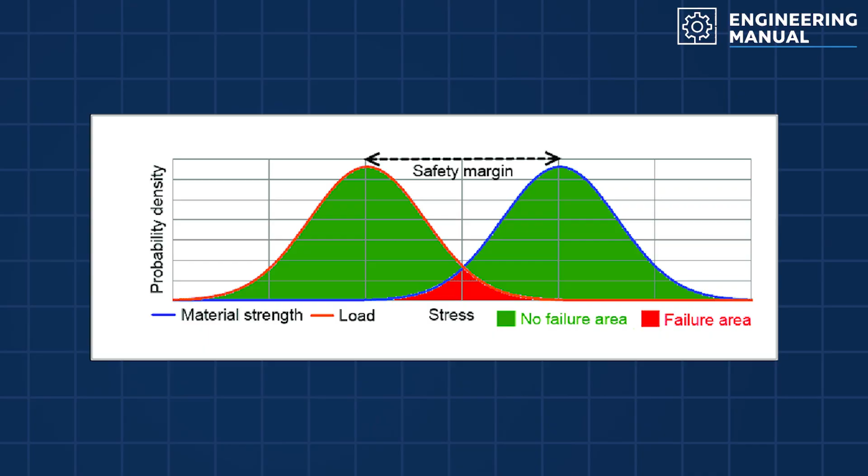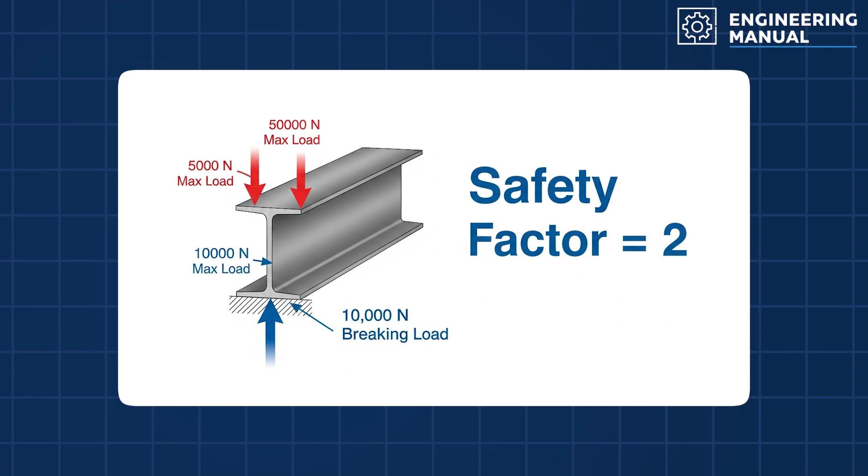At its simplest, a margin of safety is the buffer between the maximum stress a system is expected to experience and the stress that would cause it to fail. Engineers often express this as a safety factor. If a beam can withstand 10,000 newtons before breaking, and the maximum expected load is 5,000 newtons, the safety factor is 2. In other words, the structure can theoretically handle twice the intended load before failure.

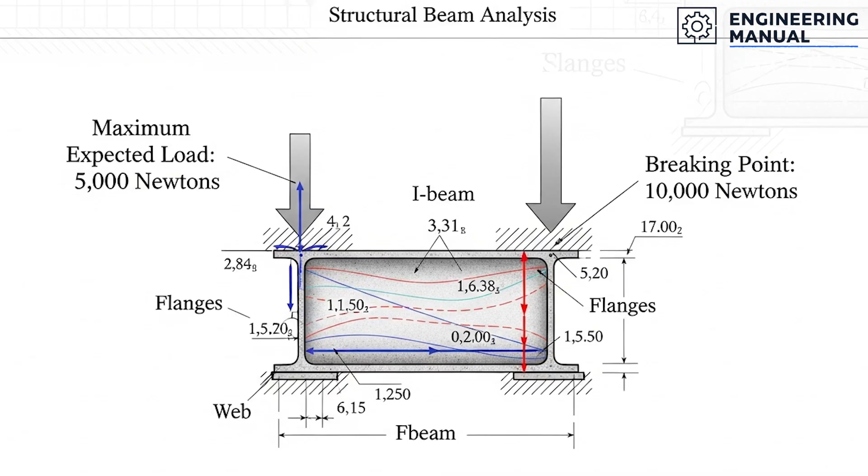But that simple ratio hides a deeper truth. The expected load is not a single fixed number. It is an estimate based on assumptions.

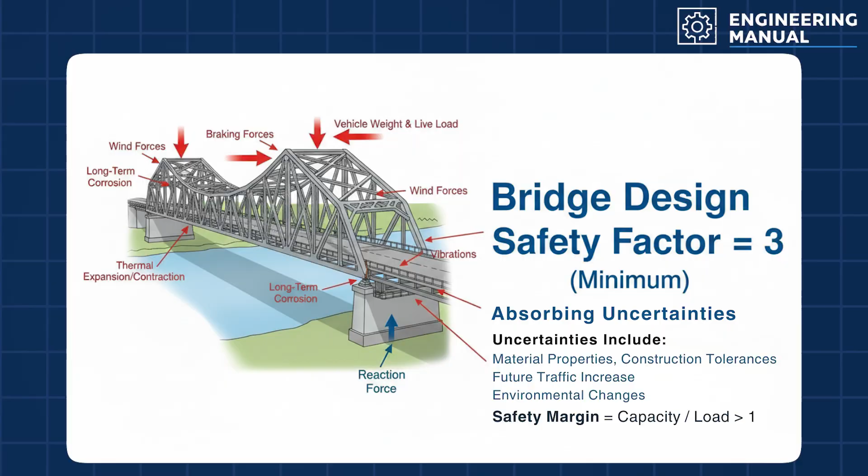Consider a bridge. The load includes not only the weight of vehicles, but also wind forces, thermal expansion, braking forces, vibrations, and long-term corrosion. Traffic patterns may increase over decades. Trucks may become heavier. Climate conditions may shift. What was once a reasonable maximum load can quietly evolve.

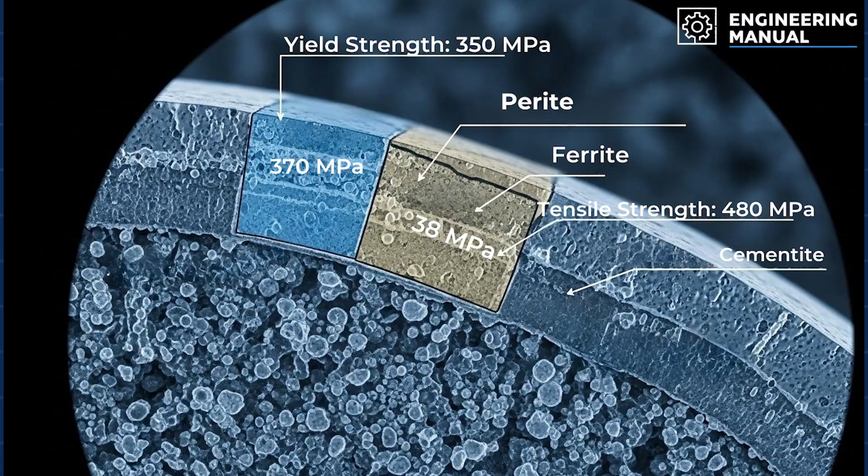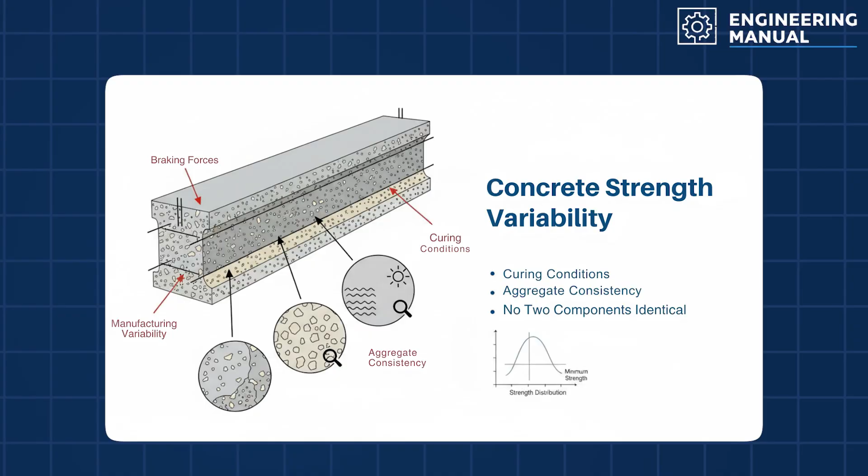Even material strength is not a single number. Steel produced in different batches can vary slightly in composition and microstructure. Concrete strength depends on curing conditions and aggregate consistency. Manufacturing processes introduce variability at every stage. No two components are perfectly identical.

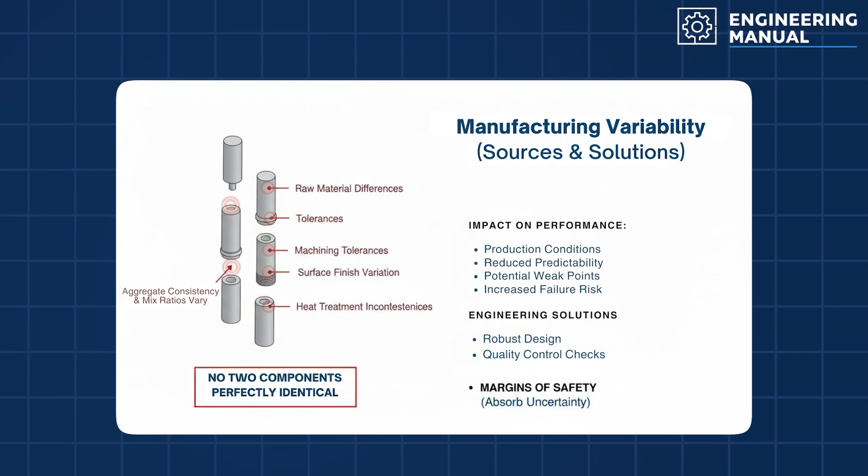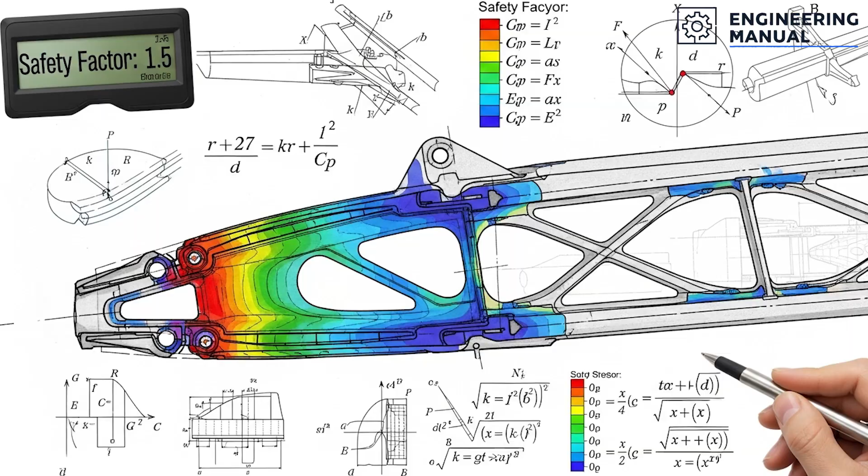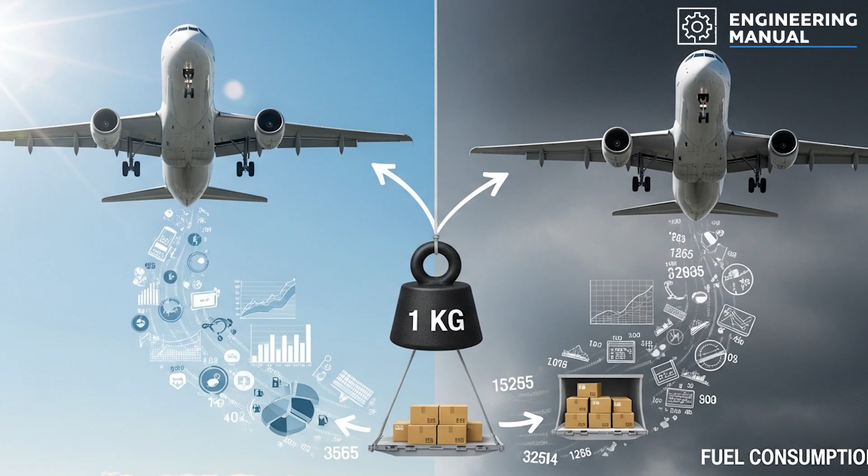In aerospace engineering, however, safety factors are usually lower, often around 1.5 for structural components. That might sound risky, but aircraft operate under a different optimization constraint. Every kilogram of extra structure increases fuel consumption and reduces payload capacity. Overbuilding an airplane is not just inefficient. It can make the entire system economically unviable.

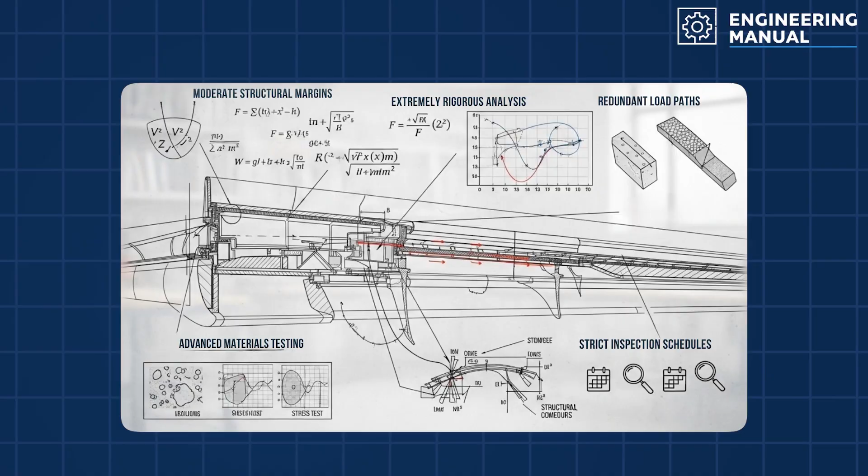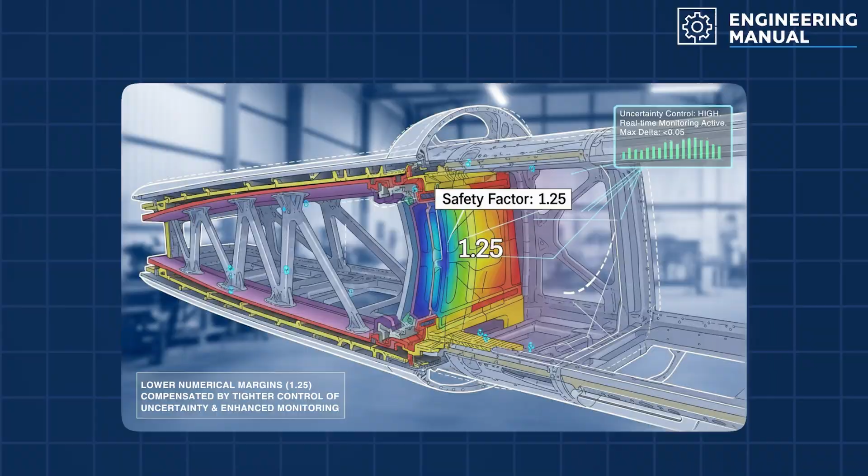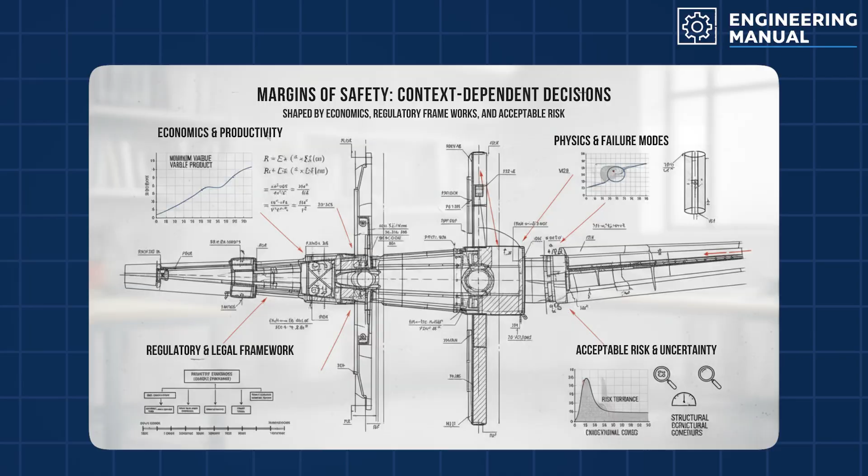Instead of relying solely on large safety factors, aerospace engineers combine moderate structural margins with extremely rigorous analysis, advanced materials testing, redundant load paths, and strict inspection schedules. In other words, lower numerical margins are compensated by tighter control of uncertainty. This highlights a critical principle. Margins of safety are not universal numbers. They are context-dependent decisions shaped by economics, physics, regulatory frameworks, and acceptable risk.

To understand this more deeply, consider how loads are categorized. Engineers distinguish between static loads and dynamic loads. A static load might be the weight of equipment resting on a platform. A dynamic load involves motion, acceleration, or impact.

Dynamic loads can amplify stress beyond what simple static calculations predict. A sudden gust of wind can produce forces significantly higher than steady airflow. A moving vehicle crossing a bridge can induce vibrations that momentarily increase stress. Because dynamic effects are harder to predict precisely, safety margins must account for them.

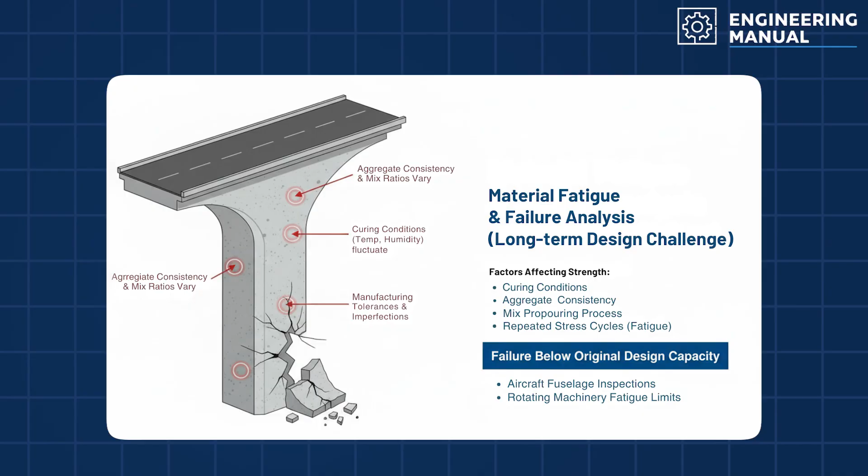Another layer of complexity comes from fatigue. Even if a structure never exceeds its yield strength, repeated cyclic loading can initiate microscopic cracks. Over time, those cracks propagate. Eventually, failure can occur at stress levels far below the material's original capacity. This phenomenon is why aircraft fuselages are inspected regularly and why rotating machinery components are assigned fatigue life limits.

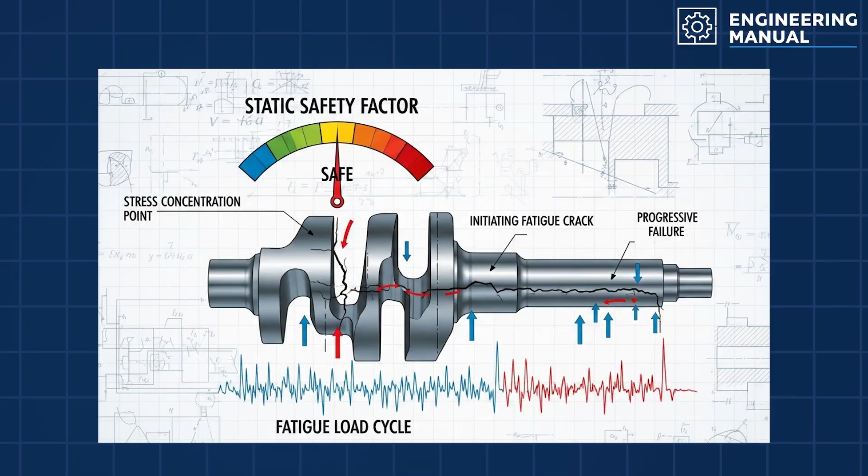A static safety factor alone cannot prevent fatigue failure. Engineers must analyze stress cycles, estimate crack growth rates, and incorporate inspection intervals. Margins of safety in this context are tied not just to strength, but to time.

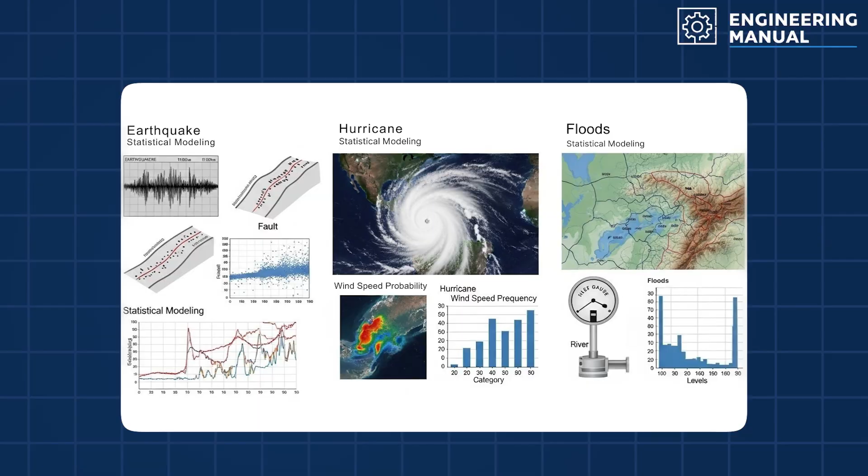Now consider extreme events. Earthquakes, hurricanes, and floods are typically modeled using statistical data. Engineers might design a building to withstand a 1 in 50 year storm or a 1 in 100 year earthquake, but rare events can exceed historical precedent. When that happens, even well-designed systems can fail.

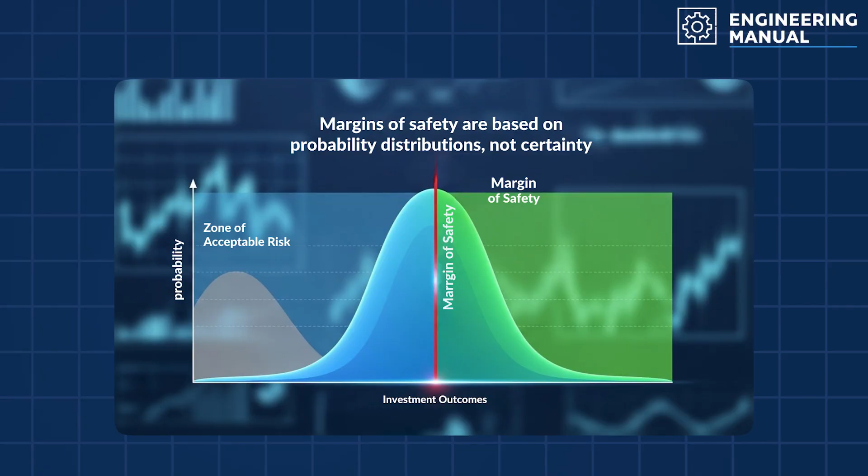This reveals a fundamental limitation. Margins of safety are based on probability distributions, not certainty. They reduce the likelihood of failure within expected conditions. They do not eliminate risk under all conceivable scenarios.

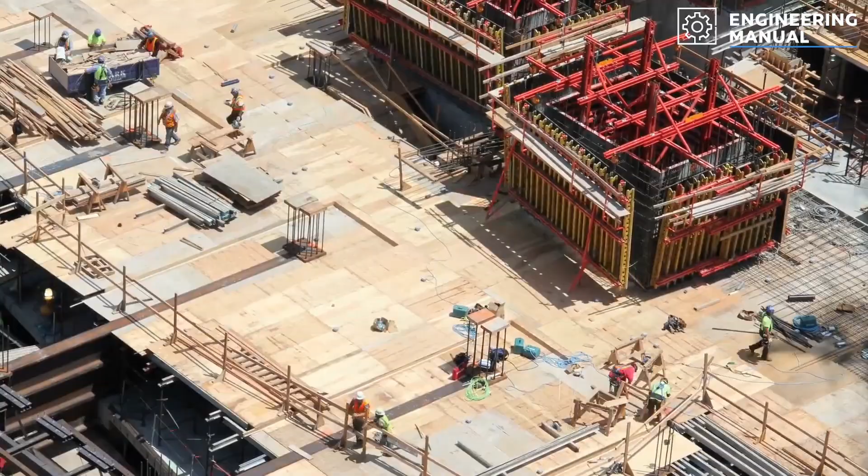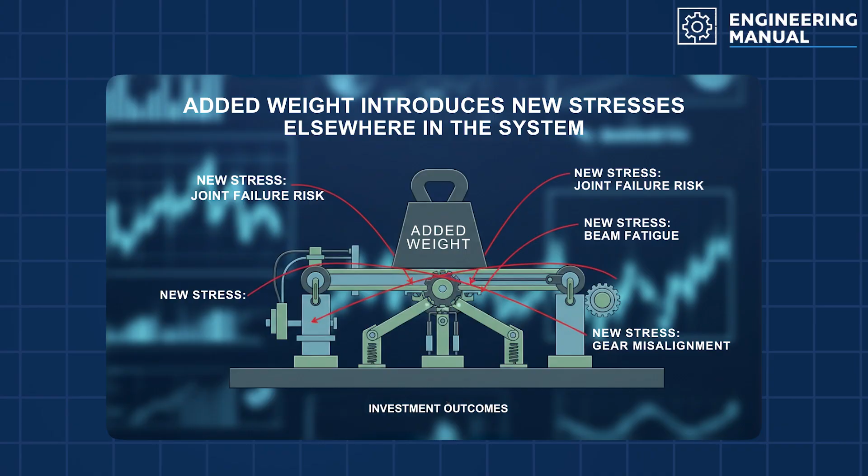There is also an economic boundary. If you attempted to design every structure with a safety factor of 10, costs would skyrocket. Materials would increase. Foundations would need reinforcement. Transport and installation expenses would grow. In many cases, the added weight would introduce new stresses elsewhere in the system.

Engineering is not about maximizing safety at any cost. It is about optimizing safety within practical constraints.

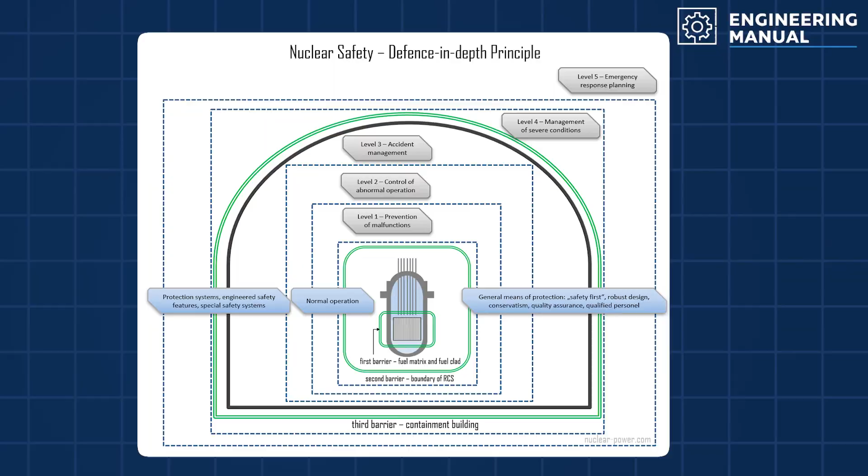Consider nuclear power plants. Structural components incorporate substantial safety margins, but the system goes further. It uses defense-in-depth strategies. Multiple cooling systems exist so that if one fails, another can take over. Containment structures are designed to isolate radioactive materials even if internal components malfunction. Automated shutdown mechanisms activate if certain parameters exceed limits. Here, safety is layered. Margins exist at the material level, the system level, and the operational level.

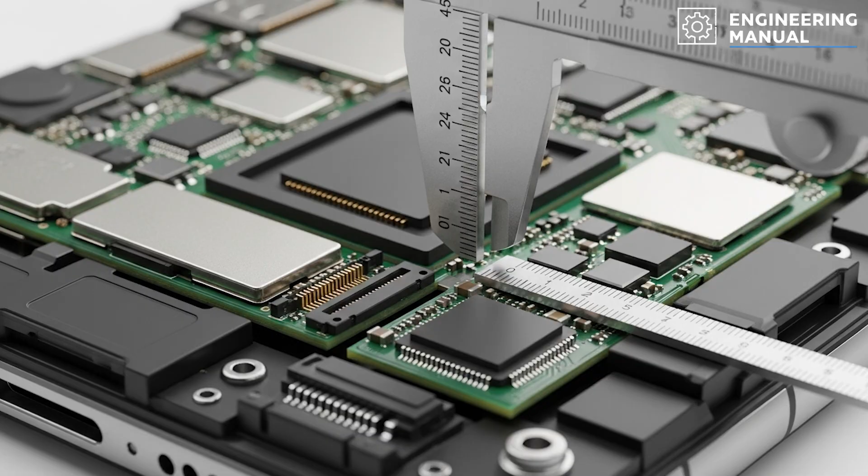In contrast, consumer electronics often operate with very small structural margins. A smartphone case is not designed to survive extreme impact. It is designed to function within normal usage conditions. The acceptable risk threshold is different.

Ultimately, a margin of safety is a structured acknowledgement of ignorance. It admits that models are incomplete, measurements are imperfect, and the future is uncertain. Rather than pretending uncertainty does not exist, engineering incorporates it quantitatively.

When failures occur, investigations often reveal that the margin itself was not absent. Instead, assumptions were flawed, loads were underestimated, environmental conditions changed, maintenance procedures were not followed, degradation progressed unnoticed. The margin was consumed gradually until nothing remained.

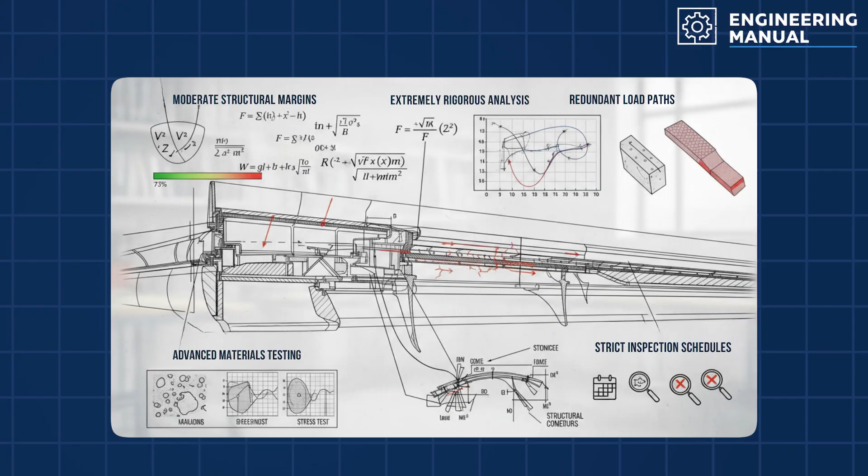This is an important conceptual shift. A margin of safety is not a permanent shield. It is a finite buffer. If real-world conditions push beyond predictions repeatedly, that buffer erodes.

Understanding margins also changes how we think about over-engineering. Adding material blindly is not the same as improving safety. True safety comes from understanding where uncertainty lies and addressing it directly.

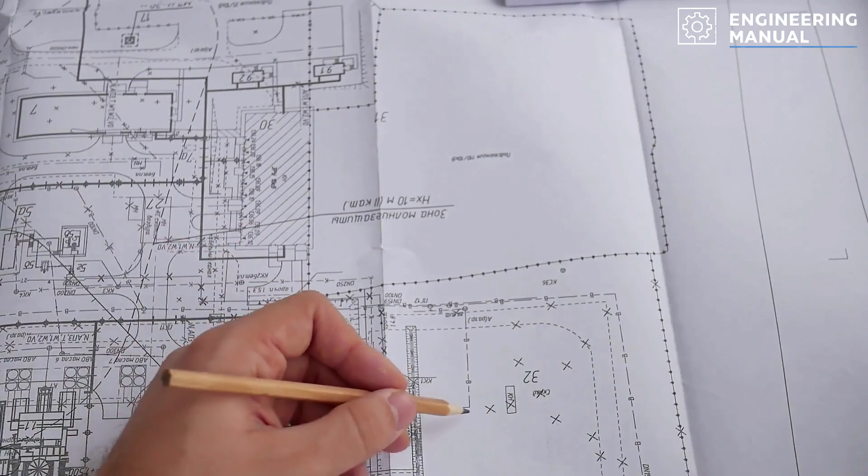Sometimes that means increasing thickness. Sometimes it means improving inspection frequency. Sometimes it means redesigning geometry to reduce stress concentrations. Sometimes it means implementing redundancy. The goal is resilience, not excess.

So how much safety is enough? The answer depends on consequence. A garden shed collapsing is inconvenient. A bridge collapsing is catastrophic. An aircraft structural failure is unacceptable. The higher the consequence, the more carefully uncertainty must be managed.

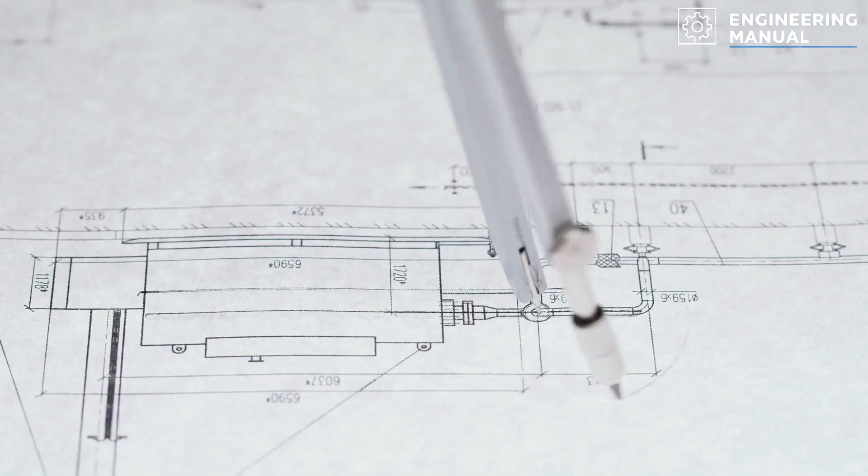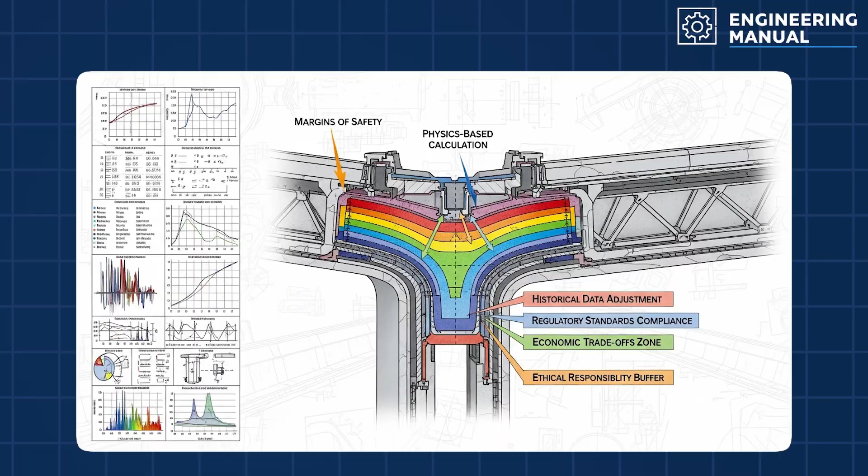Engineering margins of safety are therefore not arbitrary numbers. They are deliberate decisions informed by physics, historical data, regulatory standards, economic trade-offs, and ethical responsibility.

The next time you see a bridge flex slightly in the wind or an aircraft wing bend during turbulence, remember that movement is not failure. It is part of the design envelope. Engineers expect structures to experience stress. What matters is that those stresses remain within calculated limits, with room to spare.

Margins of safety represent that room. They are the space between performance and collapse. They are the difference between a structure that survives decades of variability and one that fails under unforeseen strain.